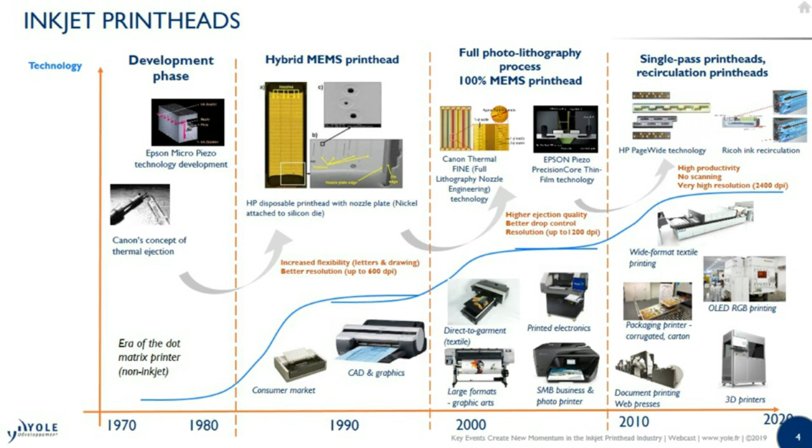As a new definition, I would like to do a reminder of the different techniques we are using in inkjet technologies and what we are covering also at Yole Development. The ejection principle is either continuous or drop on demand. We are focusing more on drop on demand because it's where the number of players is larger. For drop on demand, we can separate it into two main actuation technologies: thermal and piezoelectric.

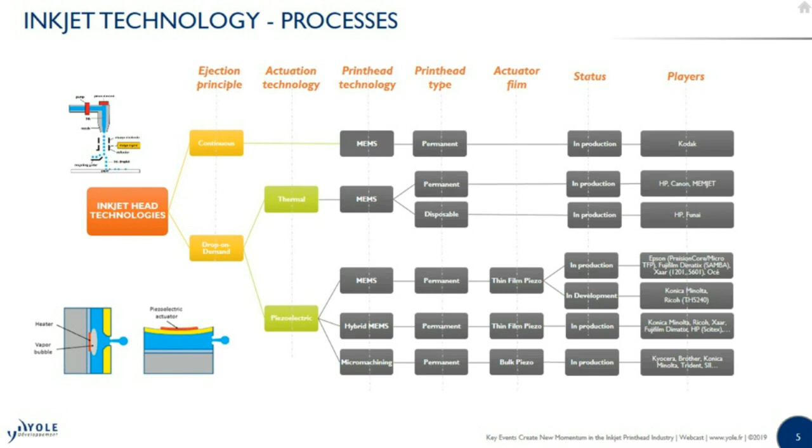Those two different ejection principles mainly segment the players into two groups, and this is what I would like to show here. Again, it's a mature market with a limited number of players.

The leaders are still the same ones you probably know in thermal for the drop-on-demand ejection: HP, Canon, Funai after the acquisition of Lexmark, but also Memjet, which is an increasing player in terms of market share in this sector. We will discuss the RealFast Print Technology later on.

In Piezo, Epson, Fujifilm Dimatix, Xaar, Brother, and Konica Minolta are the main players. It's where you have the most important number of players in this piezoelectric area.

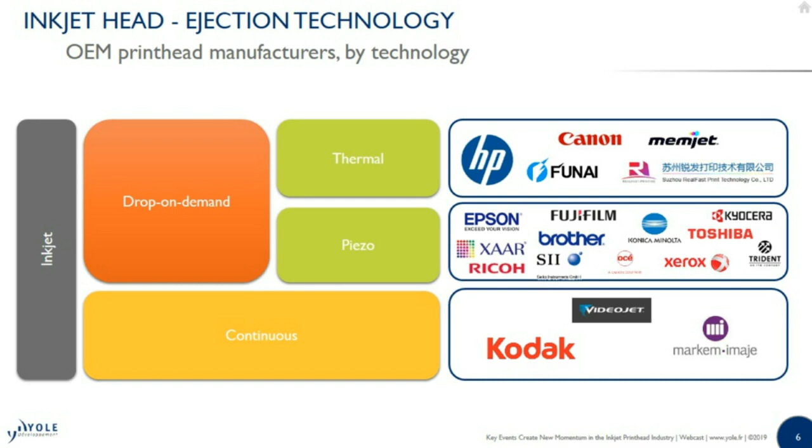In the continuous market, it's mainly Kodak that is the leader in this area. And based on the technology, we have the conventional printheads. What we name the conventional printheads are the printheads based on bulk PZT, so it's the piezo ceramic that is processed to get the actuation.

You can see again the players I mentioned just before, but we have also the MEMS printhead players, and this industry is a little bit different because it means that you need to have some semiconductor capabilities to manufacture MEMS printheads. This is something that is also synonym to huge investment and some critical knowledge to manufacture either thermal on one hand or thin film piezo ejection devices.

Here we can have IDM, so the companies that are manufacturing their own printheads, but also we would like to mention the foundries that are also helping in this area to manufacture the MEMS part of the printheads or the full printheads.

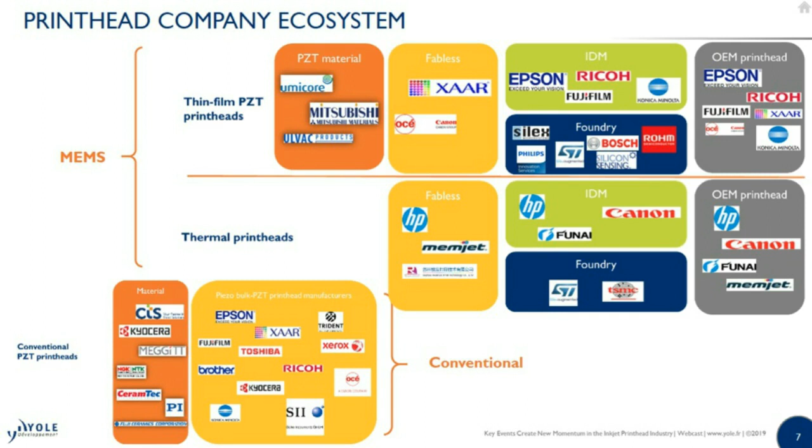So the application market now. The inkjet printhead, we have divided this into three main segments. The first segment is the consumer and office, where we have more of a razor blade type of business model, so the inkjet printers are very low cost, and the consumables are doing the business here. The graphics and signage, where you have mainly the large and wide format applications, and the industrial, commercial and industrial applications.

You can segment these commercial and industrial applications into document printing, textile, label and packaging, ceramic decor, 3D and functional printing. This is something that is properly divided and explained in our report.

This is also where you have the equipment above, just below the image, and you can find the price, the printer price range there. So the equipment could come from a few $10,000 to several $1 million, depending on the application.

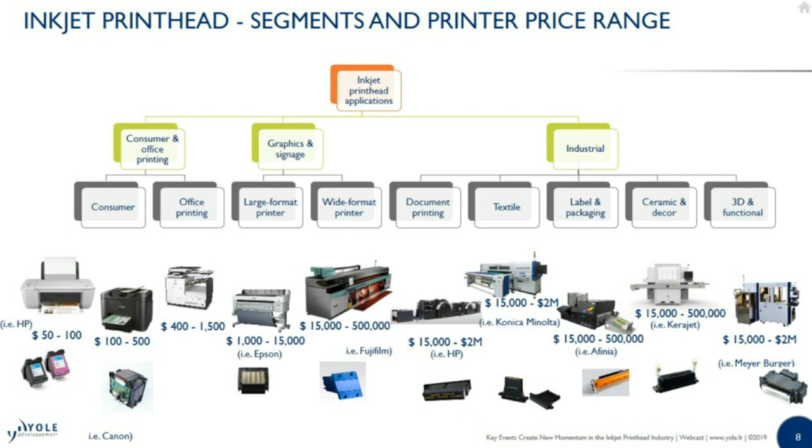And to combine this information from application and technology, this is a representation we have now on where you can find which type of technology and which type of printhead applies. This representation is showing the resolution and the drop volume.

In the gray area, you can find the consumer part, where the thin film piezo and the MEMS printheads could have an interest because of the volume generated. It's more the consumer and office printing applications.

In the green area, it's where you need to have higher resolution, and it's another interesting capability of the MEMS technologies to go to very small size of nozzles, but also to increase the resolution. With this, you can reach all the graphics area, poster, and also label and packaging, depending also on the application. So this is the green area, with a lot of thin film piezo and some thermal printheads.

In the yellow one, it's more on the lower volumes and also lower resolution, but where we require more droplet volumes, and here we are on the industrial application, where the bulk piezo is more the domain of this type of printhead - the bulk piezo that ejects with more powerful ejection, more volumes.

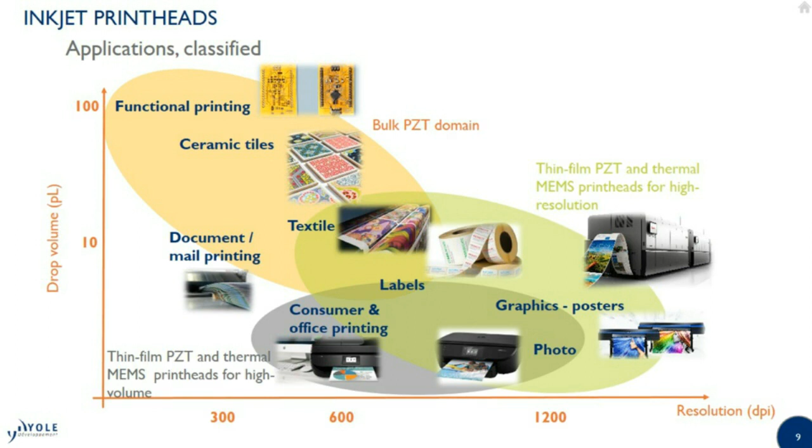Here, related to the three major markets that I mentioned, I would like to show you the results we get from our investigation on the inkjet printhead market. This printhead market has a global forecast that is growing at 4% compound annual growth rate. This market is expected to reach $2.7 billion - so it's the inkjet printhead market again - coming from a 2.09 or 2.1 billion market in 2018.

If we look into more details about this market, you can see that the consumer market has a slight decrease. This decrease is just after a small rebound we have seen in 2017 and '18, mainly due to HP revenues that increased slightly. This is partially because of the loyalty program, customer loyalty program, that had an impact on the revenues, but on the midterm, we have the forecast.

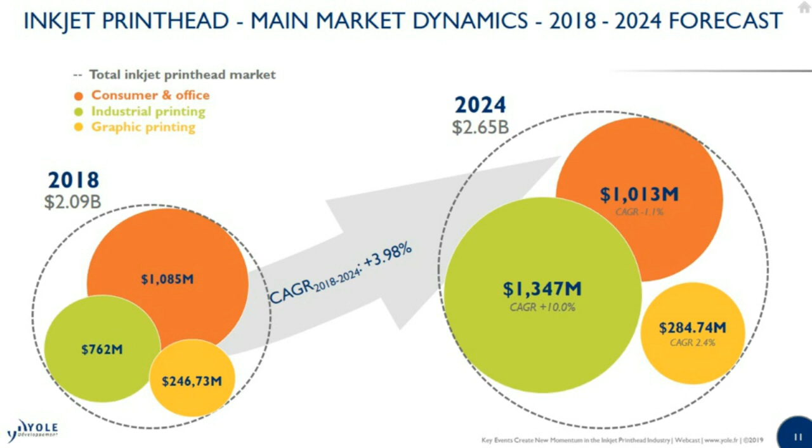About the players, they have a global presence on the main continents. They have their headquarters—a lot of companies are based mainly in Japan, but they also have offices, R&D activity, and even some production in Europe or the US, to be closer to the customers and get all the information from their needs.

If we look at the market share, the four first companies represent about 45% of the market: HP Inc., followed closely by Epson and Canon, and Fujifilm Dimatix. Those are the first industrial companies, closer to the top three that mainly serve the consumer market and graphics printing.

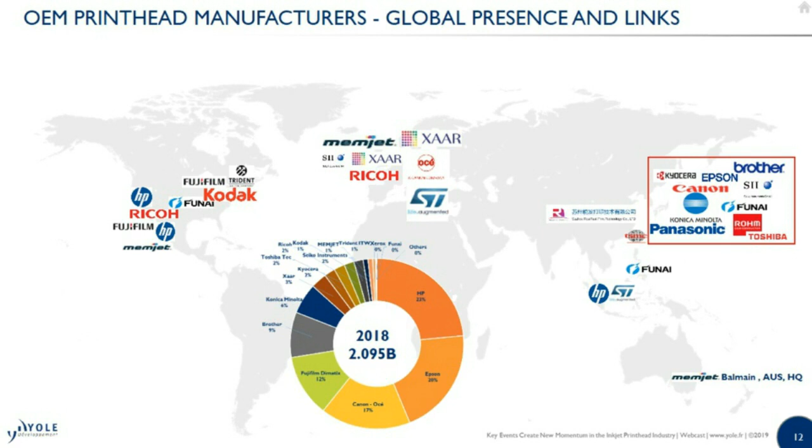About the key events, the presentation is also based on these. It's a mature market, so we have a number of new products, but in terms of the structuration of the industry, the number of mergers, acquisitions, or events are really limited.

But we can highlight some very interesting and important events, like the Panasonic printhead asset that was acquired by Konica Minolta in 2018, reinforcing Konica Minolta's access to MEMS thin film Piezo capabilities.

The announcement of a new player in the area of inkjet printheads—Real Fast Print Technology, a Chinese company that just announced they are ready to produce thermal inkjet printheads.

Epson has completed and announced a new factory, with a huge investment in terms of the buildings, the new building, and new production lines, to increase PrecisionCore printhead output, which will replace their former technology.

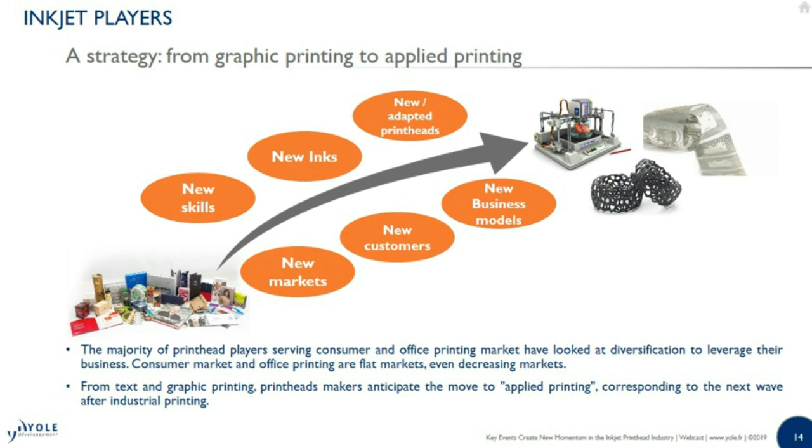To illustrate the different milestones of the major players: it started from graphic to commercial printing in the past, with HP acquiring Scitex to move into commercial printing, and Canon acquiring Océ, the Dutch company, to access document printing and large formats, gaining capabilities in Piezo printhead applications.

Now we're going a step forward to growth opportunities in the industrial market. Again, HP made the transition to 3D printing, even if it's not properly 3D inkjet printing—it's a powder bed technology, but using their printheads to dispense the fusing agent.

The Konica Minolta acquisition of Panasonic—knowing that Konica Minolta is one of the companies involved in functional printing applications, like OLED display and lighting—shows they are really involved in this market. They wanted to take the opportunity to get Panasonic's patents and capabilities in terms of MEMS technologies and their development.

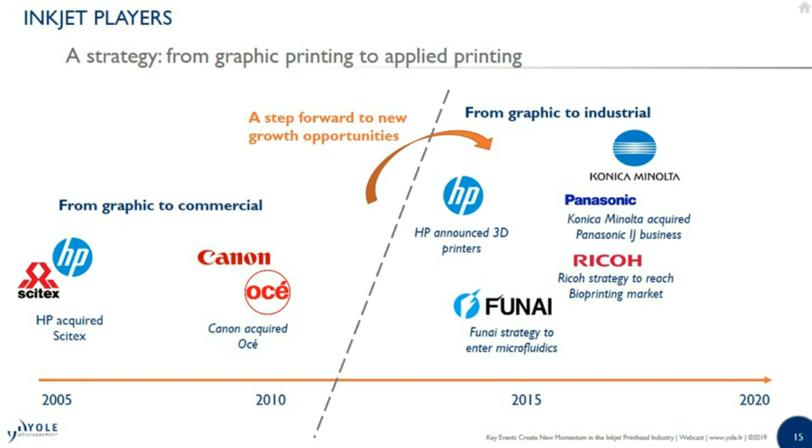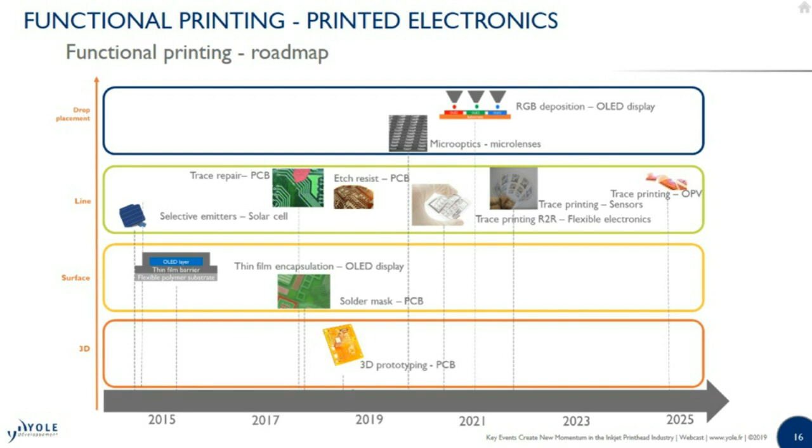This is one of the roadmaps we have established on functional printing, showing that today we also have this roadmap related to applications in the display market, PCB, flex or printed and flexible electronics, where some growth is possible for inkjet printheads. This is also true for biodispensing, just to show that inkjet printheads are also used for bioprinting, but several competing technologies are also in place.

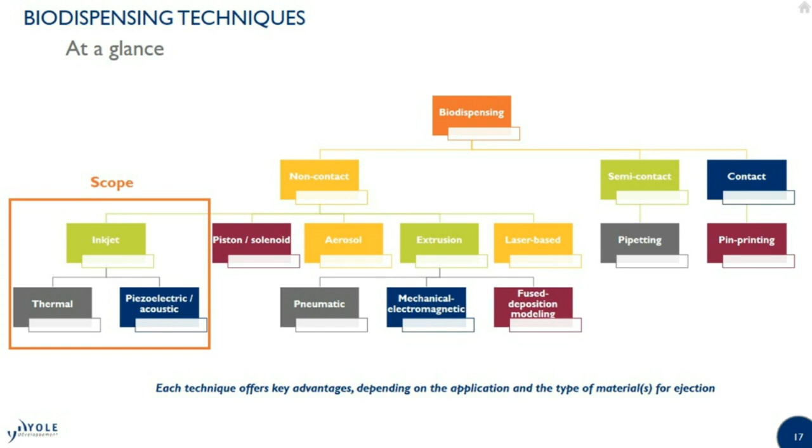It could create some opportunities, and here are some benchmarks of the techniques we have done, just to show you that inkjet printheads could be used there, but dispensing is much more than only inkjet printing.

For example, inkjet printing could have a very interesting application for high throughput screening for pharma, also for liquid handling, which is what Funai is doing at the moment with Funai Fluidics. For bioprinting, Ricoh is involved in this area. However, extrusion dispensing technique is one of the main technologies now.

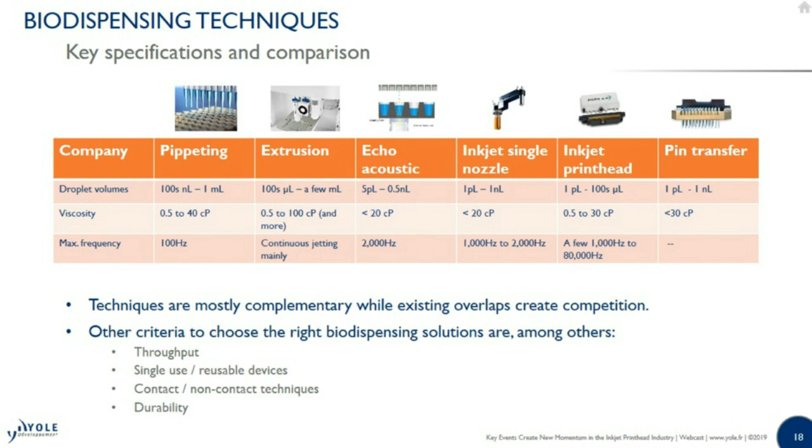What I mentioned about Cellink before is about the technique to bioprint some organs. Cellink is one of the companies with very interesting activity now. They would like to reach this market of more than $800 million for bioprinting, and they have growth through merger and acquisition at the moment to reach this market.

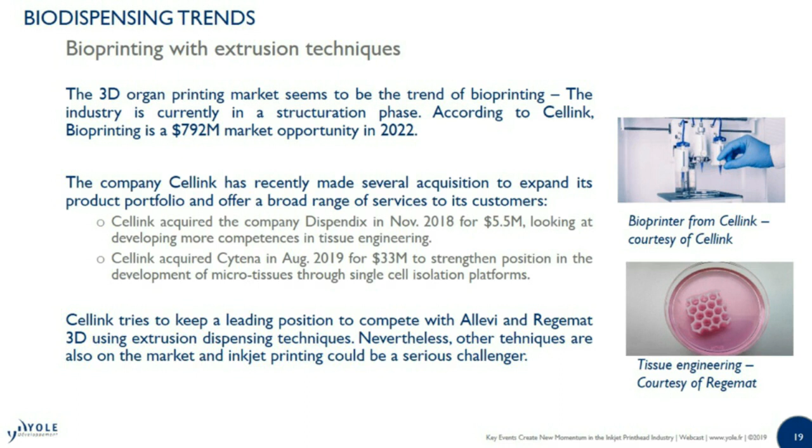Regarding the technology trends today, I will not go into detail because you will have the next presentation with more detail about the technology, but it's just to mention that Epson, with the new factory, will increase its Epson PrecisionCore technology with thin film piezo.

This is one thing very important for Epson, and we are now looking at this technology and the increase of production to see how this market will go, and what will be the business model of Epson and the impact on the market with this printhead that is really decreasing the price with this technology.

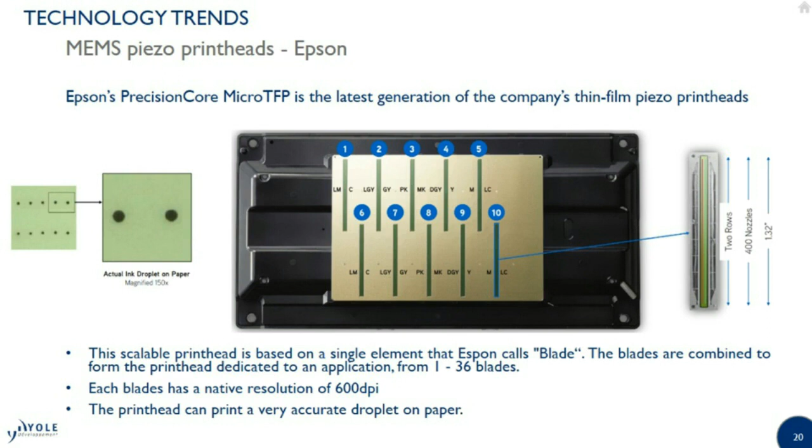Just one word about RealFast Print Technology. This Chinese company, at the moment we know, is part of the Anoky Group, which is a chemical company. They mentioned that they are ready now to produce the first inkjet printhead for thermal ejection, and they also have a piezo printhead that is also ready. At the moment, we would like to follow this company.

We have the same scenario with Memjet a few years ago, but it was on single pass printing. We don't know of any disruptive technology now, but it's something we would like to follow.

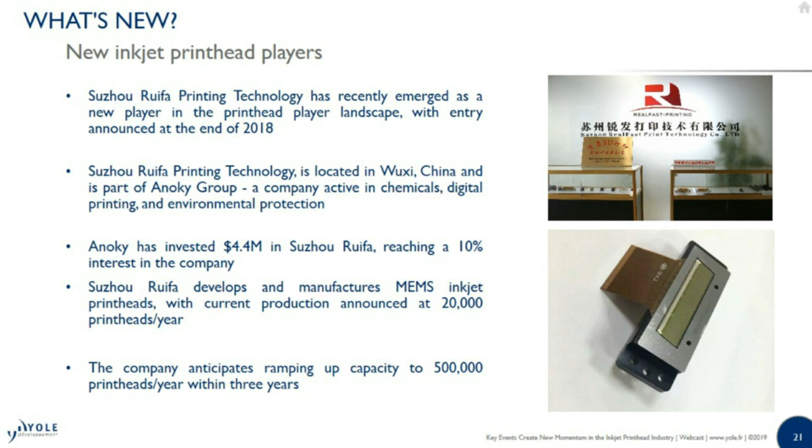And for the main advances in the technology, again for inkjet printheads, the single pass printhead, also due to MEMS technology, is one of the major advances of the past years.

At the moment, we would like to mention that Epson is combining printheads to do single pass on label printers, but also for office printing now.

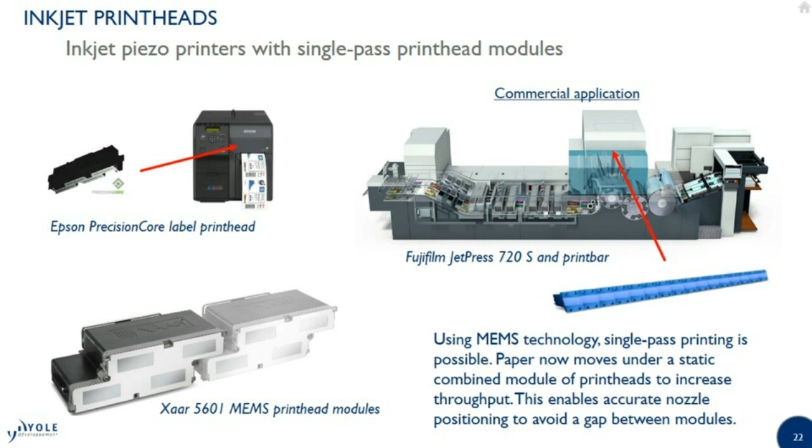Xaar is on the way to release the 5601 MEMS printhead with the module, the S shape, which could also be combined for applications with high throughput. So the idea is really to use it for high throughput.

Another really interesting thing is ink recirculation. This also shows the interest of printhead makers and manufacturers to go into industrial printing applications, because this is a way to avoid the major issue of printheads, which is clogging when using functional inks.

This presents the ink recirculation printheads, where you have not only recirculation inside the printhead, but also in the nozzle. This avoids the clogging effect and also the sedimentation effect in the printhead. It allows the use of conductive inks with particles, for example in OLED, well, not only OLED, but mainly for PCB or printed electronics applications.

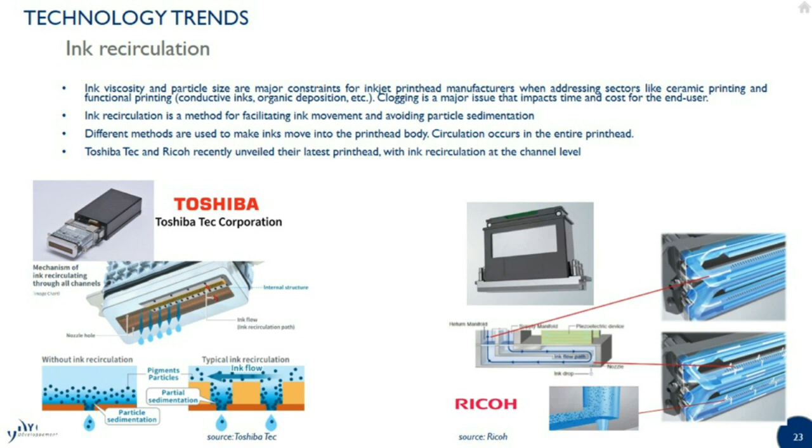We are talking a lot about the piezo printhead here, but also the thermal printhead, like the HP latest latex R2000 printhead, is based on ink recirculation. The Canon printhead for office printing is also based on this ink recirculation technology. For the use of white ink, there's a real interest to avoid clogging and to avoid maintenance time and cost for the customers.

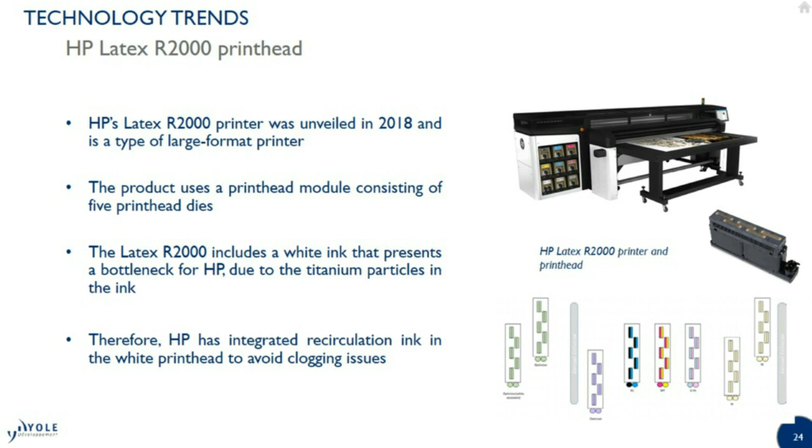So this is what I would like to present you today. It's really just a part of what we have mentioned in our report.

Just for the key messages, I would like to mention that the inkjet printhead market is mature, but still with key events happening. We forecast a market of $2.6 billion with about 4% growth, with an increase in the industrial market. Those key events are really on new factories, new players, and some acquisitions in this market that we will follow for the coming months.

The medium-term strategy for most of the players now is to go to applied printing, and this strategy is linked to some new technology trends, still the MEMS technology shift, but also advances in bulk piezo, recirculation inks, and single pass printing that are still of strong interest to printhead makers at the moment.

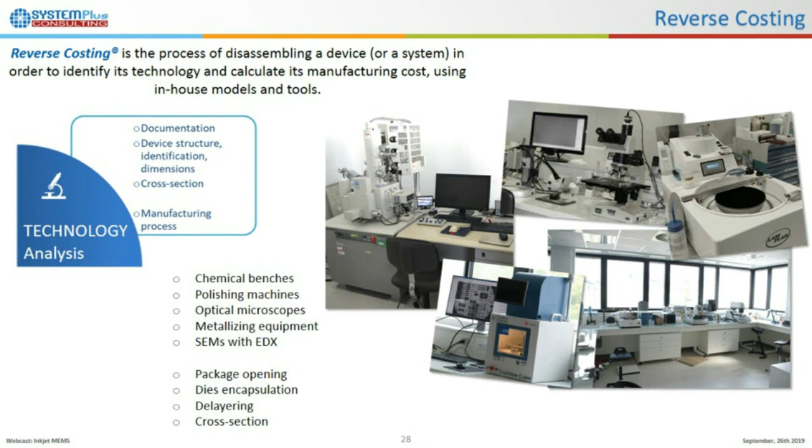With all these components, you have integrated and developed internally different software to calculate the cost of the electronic component. You began with integrated circuits, but now for more than 10 years you also cover power components, MEMS components, LEDs, advanced packaging, and electronics boards, for example.

After the physical analysis of the component, you recreate the manufacturing process and enter this process into your tools, and by combining economical parameters like the equipment, the capacity of the equipment, and the etching rate, for example, with the process, you recreate the manufacturing cost of the component. You perform this for the silicon level, but also for all the operations for the backend and for the system with the electronic board, and sometimes with the plastic part.

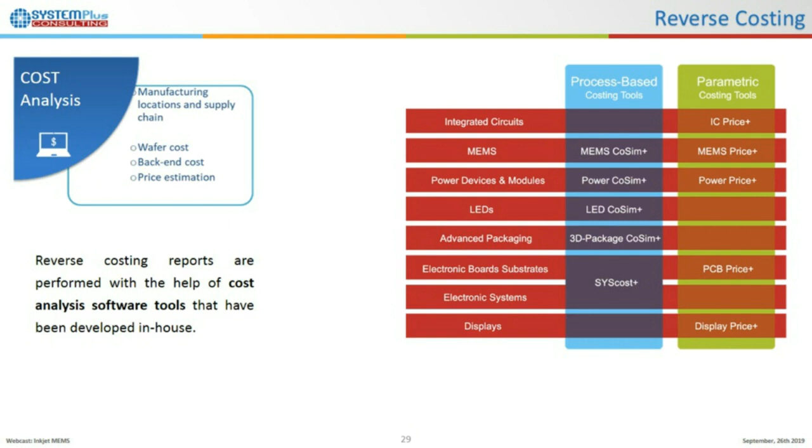In this presentation, I will present three inkjet dies: the thermal inkjet die from HP for the latest technology, the HDNA high definition inkjet die; the new Epson MicroTFP MEMS inkjet die that you can find in the PrecisionCore inkjet component; and the new MEMS inkjet die from Xaar.

For each inkjet die, you can add a slide focused on the microfluidic part, focused on the actuator, the thermal actuator or the PZT actuator, and after a slide on the inkjet die cost. And you perform a comparison between the three inkjet dies.

System Plus Consulting has already performed reverse costing of different printheads. We have bulk piezo inkjet printheads, like here the Toshiba CA4 in ceramic and piezoelectric bulk material. You have the Colorwave 600 from Océ. And you have, for example, here the printhead from Kyocera with printing in laminated steel layers, and piezoelectric actuator into bulk ceramic.

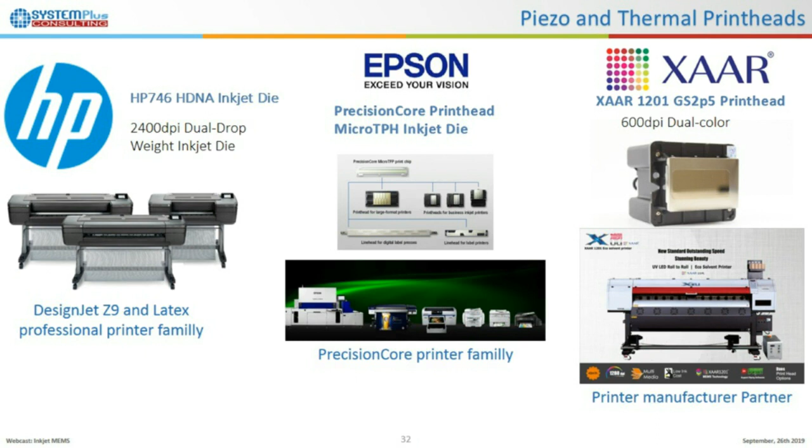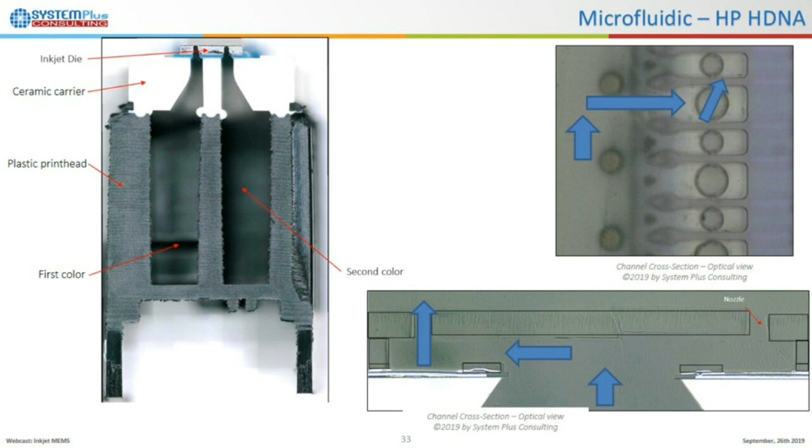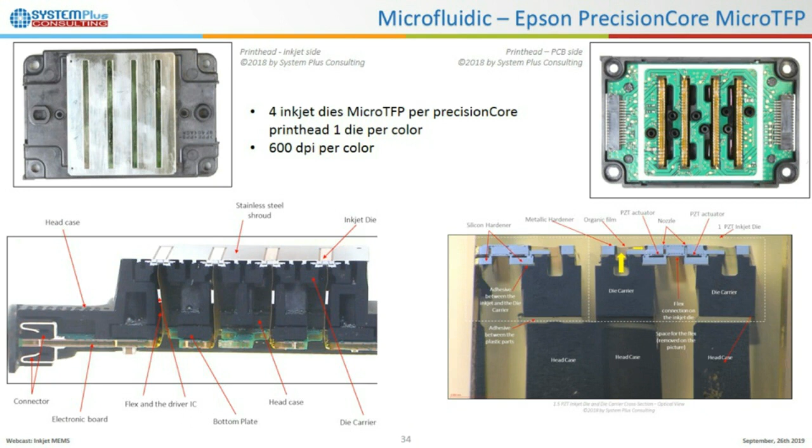Another interesting thing for the Epson component: you can see a connection by a flex between the PCB and the inkjet die, and on the flex there are the driver ICs. For Epson, each inkjet die can produce one color. But for the Xaar microfluidics, it's different, because for each printhead, you can print up to two colors.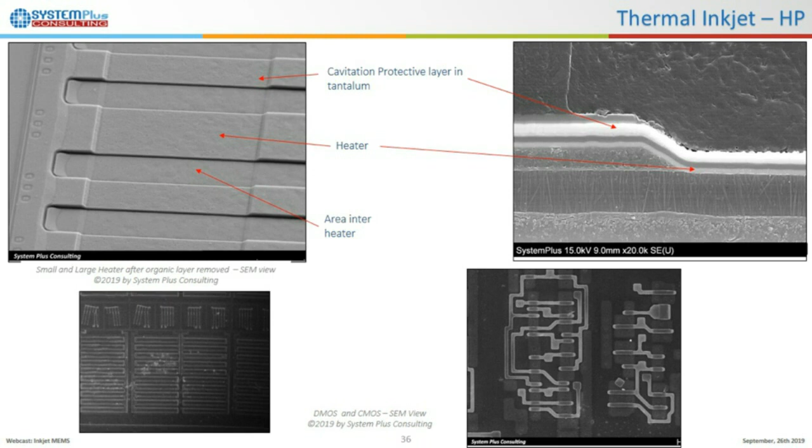The PZT actuator is probably manufactured by the sol gel solution with a spin coating deposition, and you estimate that there deposits a thickness of 1.5 micrometer, probably in 5 spin coating steps.

But it's not just the unique characteristic of this printhead, the PZT is not the same. The main parameter for the inkjet is always to share the movement of the ink and create a channel for the ink, the nozzle.

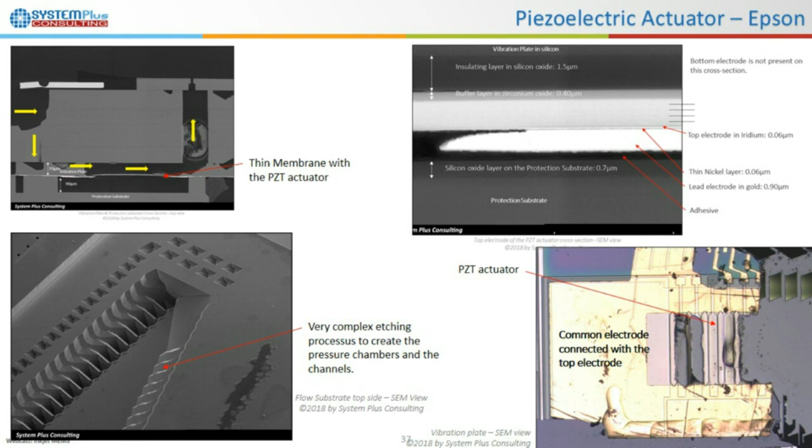Piezo actuator, always in PZT, but here the thickness of the PZT is more important, more like 2 micrometers, and the process to deposit this is more complex because there are not 5 layers but 8 or 10 layers of PZT needed to create the actuator.

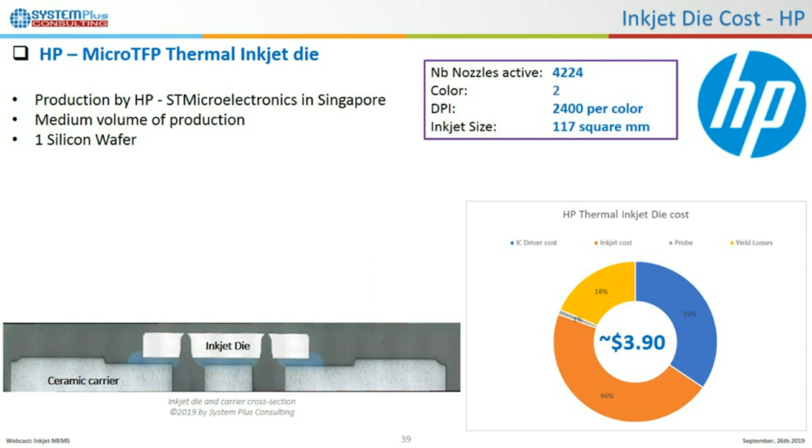For the Epson, you estimate that the production is performed by Epson in Japan. It's a high volume of production because you can find this same inkjet die in consumer up to industrial products. And to produce 1 printhead, you need to have 4 silicon wafers.

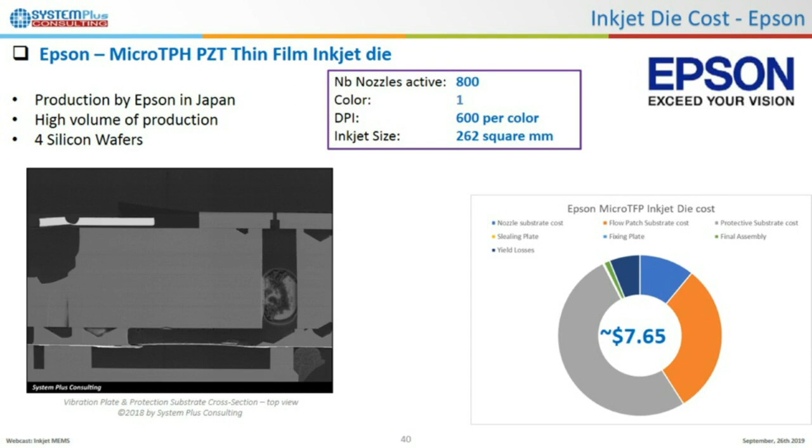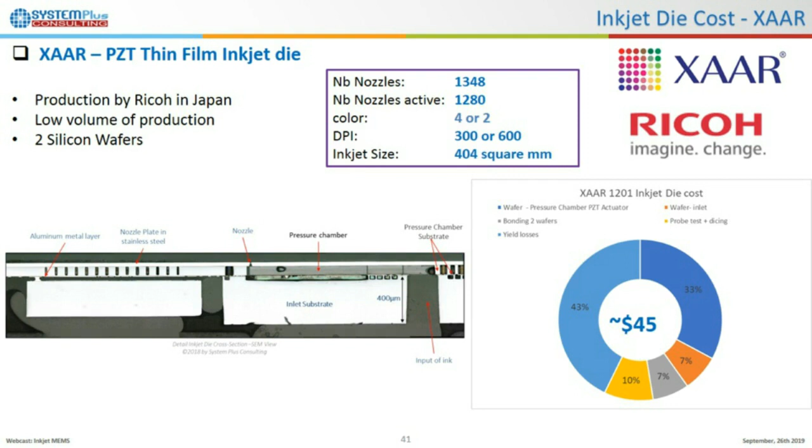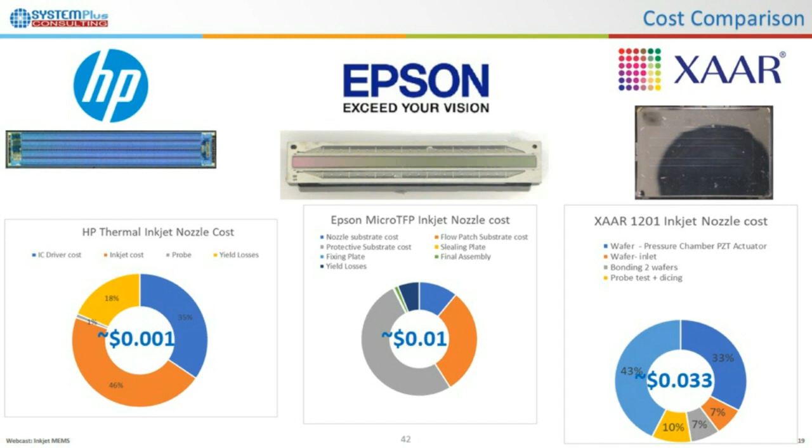Another conclusion, as Jerome already talked about, is the evolution of the HP printhead. HP continues with this thermal inkjet die, and they are increasing the definition of their inkjet. Today you can have 2,400 dpi, which is the new HDNA technology for HP.

But there are always new technologies for HP. They added the dual drop weight technology, which is new for HP and for thermal inkjet die. There is also a new technology added for this generation of product from HP: recirculation for the white ink, which is already used for example in the latex printer.

Epson has now sent to market their MEMS inkjet die with a definition of 600 dpi, and Xaar with a definition between 300 and 600 dpi. But in addition, there is the possibility to have up to 8 gray levels for their inkjet die. With this 8 gray levels, Xaar says they can have a definition of 1440 dpi.

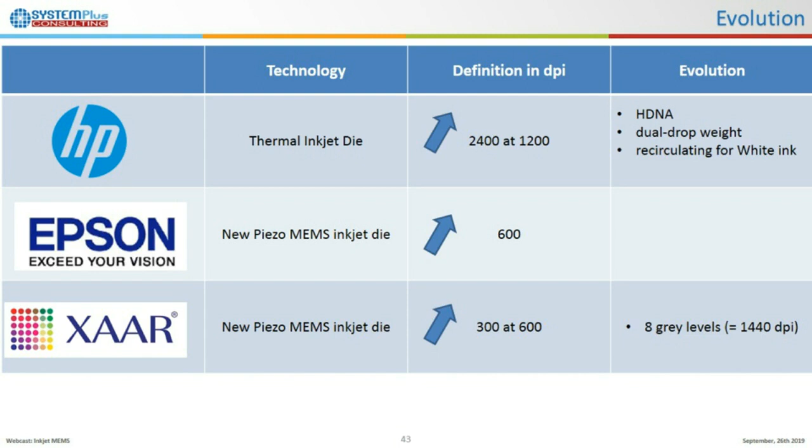Thank you for your attention. It's fine.